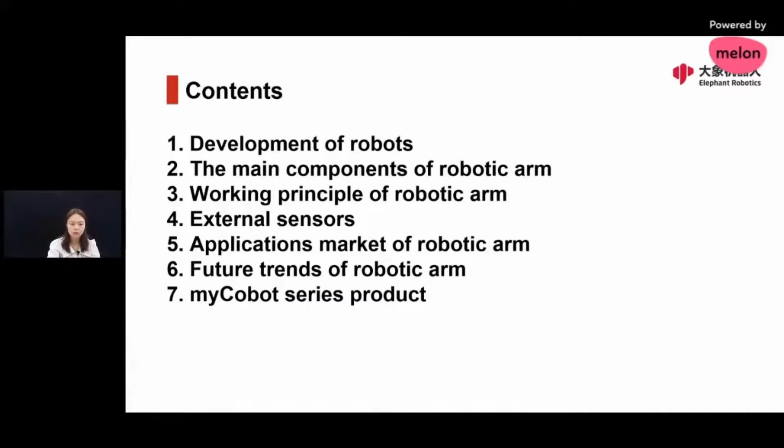So let's begin. Let's look at the development history of robotic arms. With the progress of development of human society, more science and technology culture is displayed in front of the people. In order to solve the problem of travel, people invented cars, trains, and some traffic tools. And in order to solve the energy problem, people invented wind energy, solar energy, nuclear energy, and tidal energy, and other power tools. And here we come to another problem, which is the rising labor costs.

So people invented robots. Since the emergence of robots, we have introduced the concept of robots in all walks of life. Up to now, robots have been involved in many areas, such as industrial, medical, social, and automatic driving areas. So what is the definition of robot?

What exactly is a robot? Let's look at the definition. A robot is defined as a programmable actuator that has a certain degree of autonomy and can move in its environment to perform some tasks.

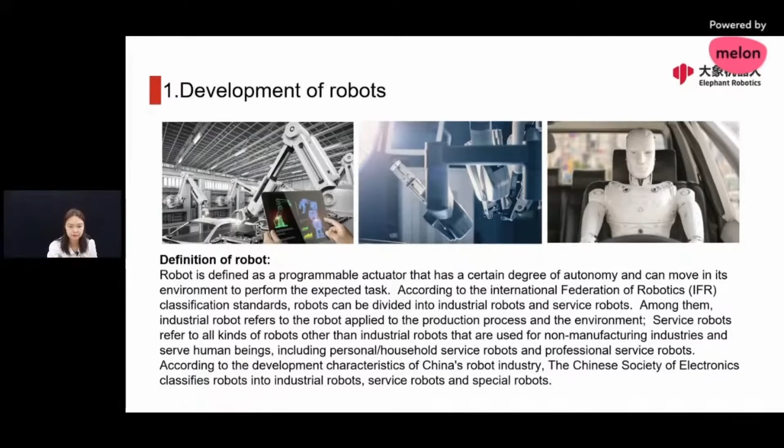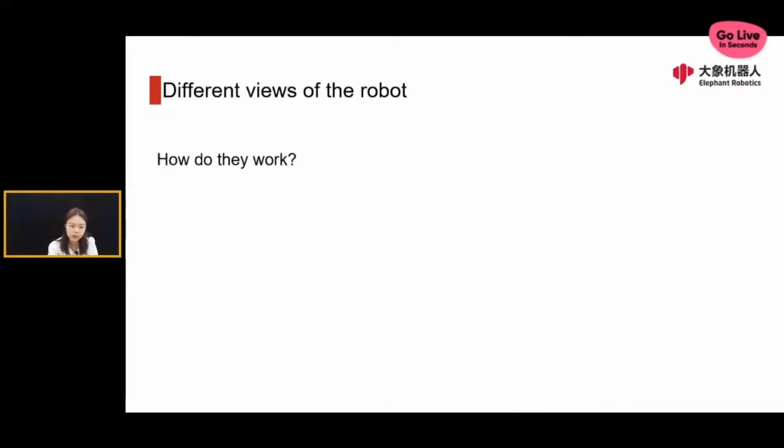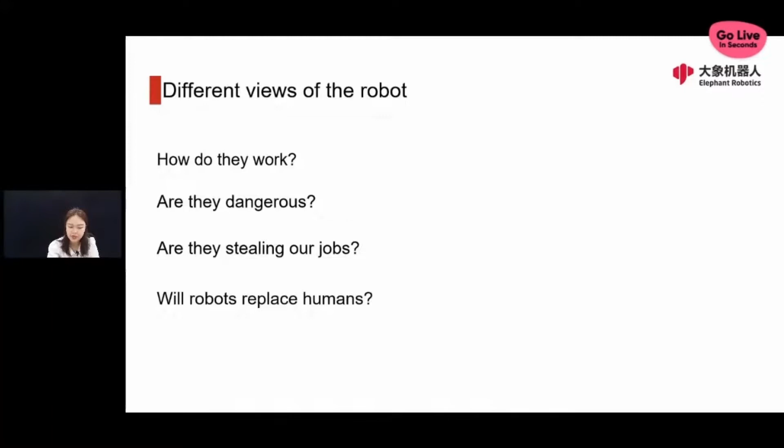So according to the event of the robot era, everyone has different views of the robot. Maybe many of you have some questions about the robot. How do they work? Are they dangerous? Are they stealing our jobs? Especially since we have mentioned that many robots are used in the manufacturing line to hire labor, human labor. Will the robots replace humans? How can we use them? What can they do for us? How do robots interact with people?

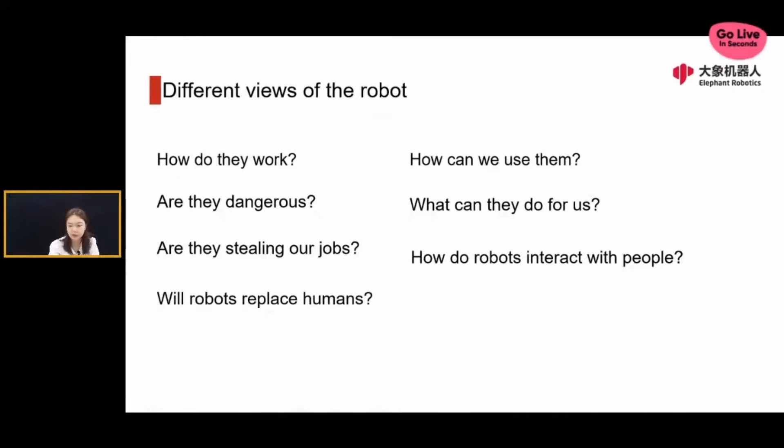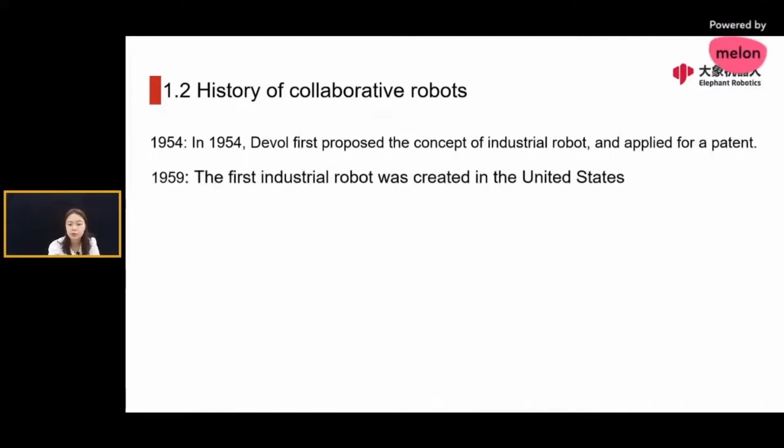With these questions, let's learn about robot development. I'm going to talk about the history of collaborative robots. In 1954, Devol first proposed the concept of industrial robot, and they applied for a patent. In 1959, the first industrial robot was created in the United States, and in the 1980s, industrial robots were further developed and played a very important role in this era.

In 1982, General Motors of the United States equipped robots with a vision system on the assembly line. So that's when perceptual robots were invented. Perceptual robots have external sensors, which we will talk about later. The offline programming can be carried out with the support of the sensing system with different degrees of environmental perception and self-correction programming functions.

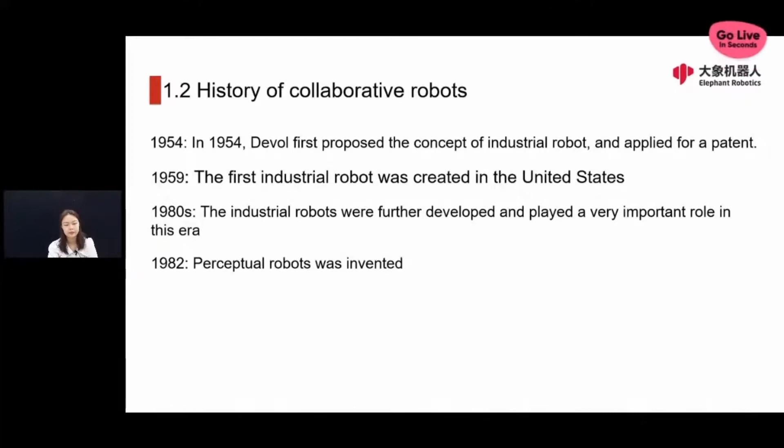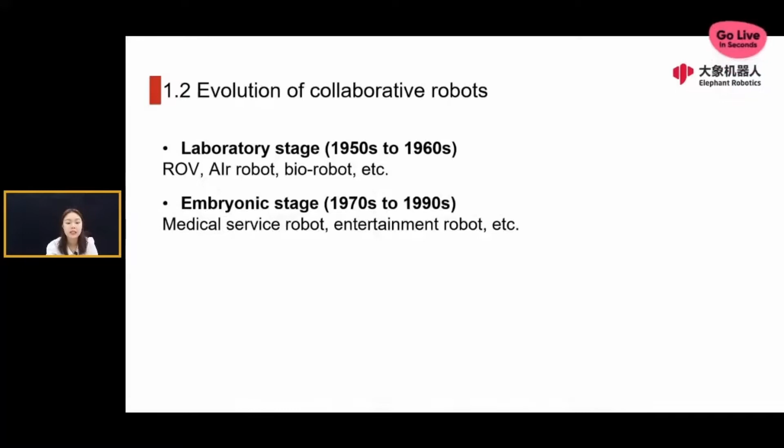We have divided the evolution of collaborative robots into 3 stages. The first is the laboratory stage, from the 1950s to 1960s. The second is the embryonic stage, from the 1970s to 1990s, when medical service robots and entertainment robots came into the public. The third stage is now, called the development stage.

The fast development of computers, the internet, and human-robot interaction has led service robots to be widely used in many applications. You may have seen some service robots on the street and in restaurants delivering food. That's the service robots.

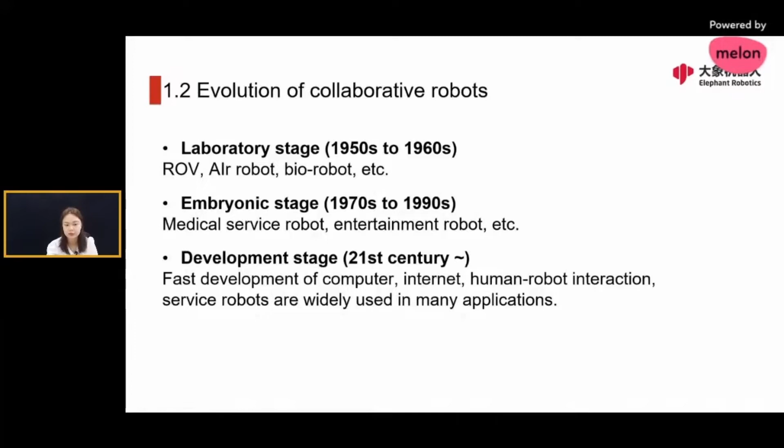So we have talked about the definition of a robot and the categories of robots. Now we will talk about the main components of a robotic arm. What composes a robotic arm?

The first one is the robot's body. The second one is the electric control box. And the third one is the demonstrator.

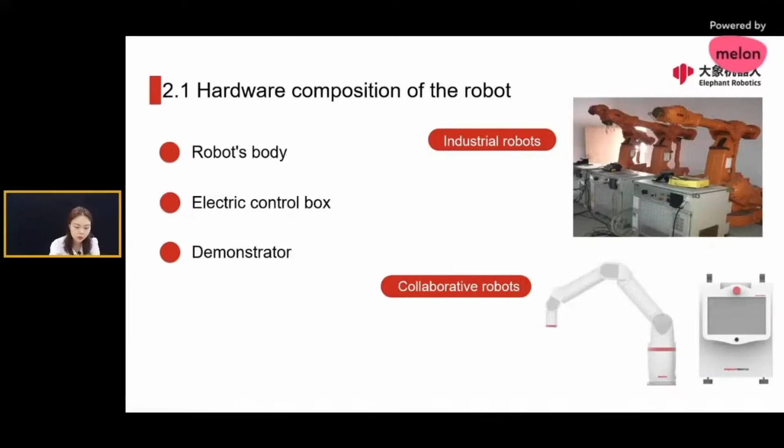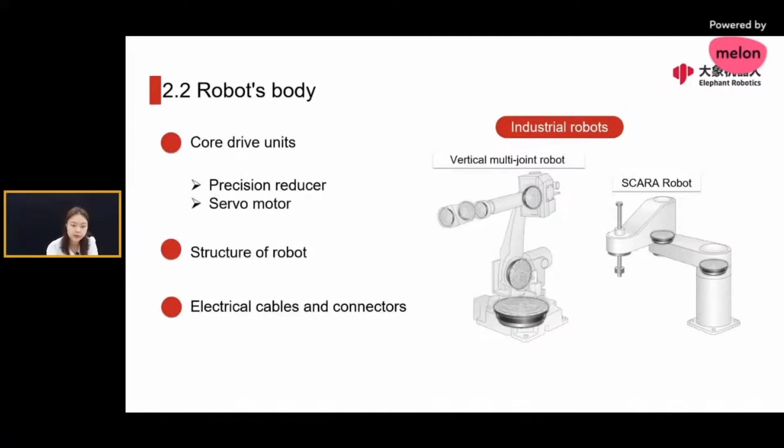In terms of the robot's body, let's look at the industrial robots here. They are composed of 3 components as well. The first one is the core drive unit. The second one is the structure of the robot. And also, because the robot needs to be powered, it needs electrical cables and connectors.

We can see from the picture there are 2 kinds of industrial robots: the vertical multi-joint robot and the SCARA robot. Here we want to talk more about the structure of the robot.

We can see all the manipulators, all the robotic arms, are made of connecting rods. This is the rod, and the rods can be connected by joints. These joints are usually equipped with position sensors that measure the relative position of adjacent links. The position of the revolution joint is called the joint angle.

So in fact, this rod is the main component. As I mentioned before, the main rod and the joint are the mechanical structure of the body. And the joint is also the core transmission component.

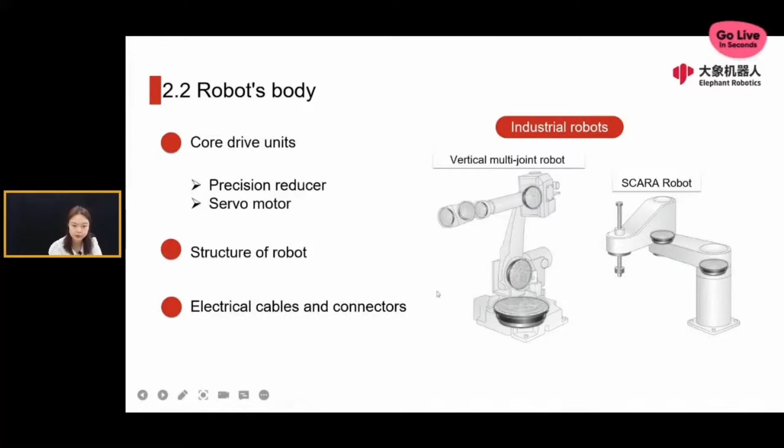If we look at the collaborative robots, the structure is relatively similar to that of the industrial robot. They are composed of core drive units, structure of robots, and also electrical cables and connectors.

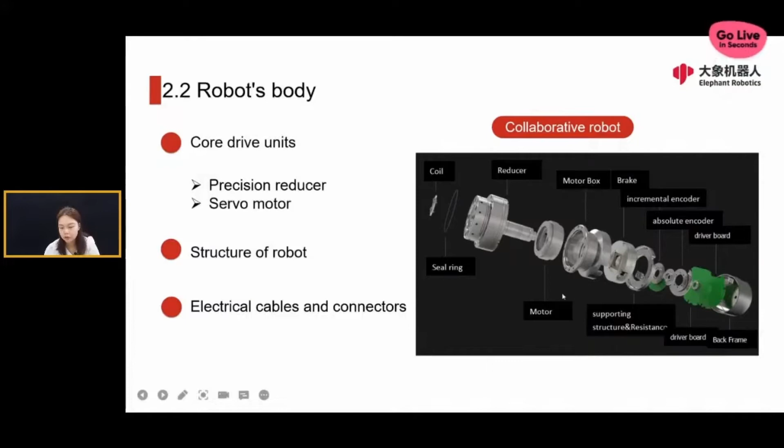But here there is a little bit of difference. We are going to talk about the core drive unit, or core transmission unit, which is the precision reducer and a servo motor. We can see in the picture here there is a reducer, and inside a motor box there is a servo motor. That's how the robots can move.

Let's now talk about the precision reducer. There are two kinds of precision reducer: the harmonic reducer and the RV reducer. So why do we need to use the speed reducer? Have you thought about this question before?

As we know, the servo motor speed is very high. In this case, the torque is very small. So how do we improve the torque? The answer is to slow down the motor, so we use a speed reducer.

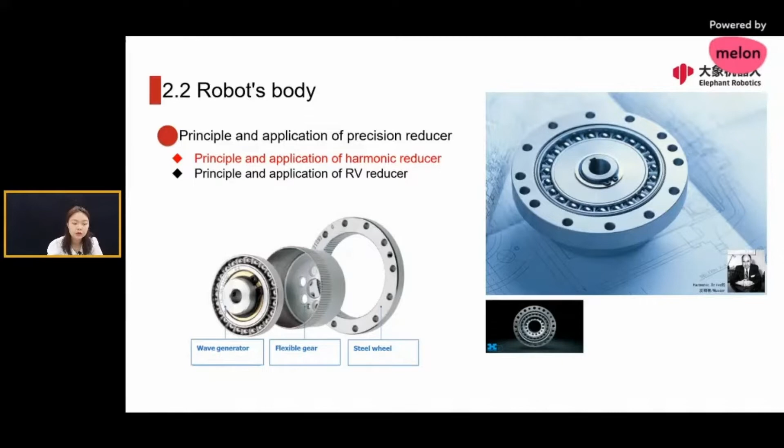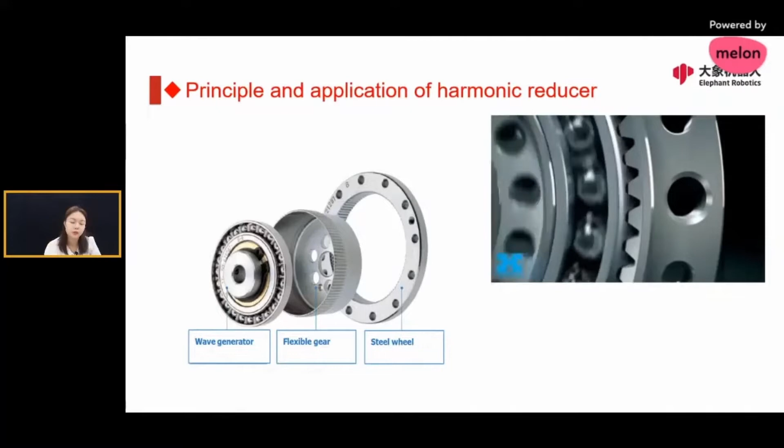The harmonic reducer is mainly composed of three parts: the wave generator, the flexible gear, and the steel wheel. In this picture and video, you can see the speed of the inside circle is relatively high, but in the harmonic reducer, the speed of the outside circle will be slowed down. That's how we use the harmonic reducer to slow down the speed.

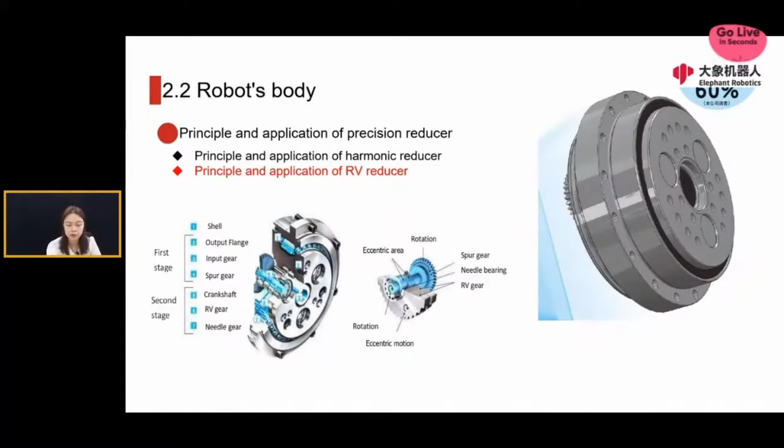There is another kind of speed reducer, the RV reducer. This reducer is more complex, so we are not going to talk about it. We just need to know that the precision reducer's function, or purpose, is to reduce the speed, and that's how we can improve the torque of the body of the robot.

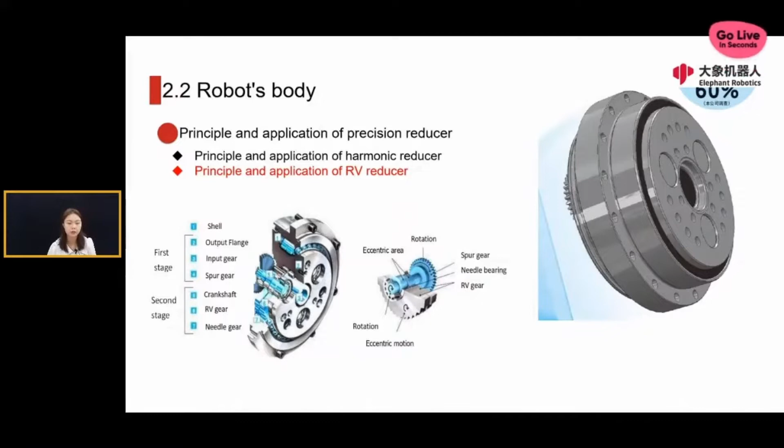Besides, we can also look at the servo motor. This is another very important core transmission component. The commonly used motor is the servo motor. There are two types of servo motor: AC servo motor or DC servo motor.

How does a servo motor work? When the servo motor receives a pulse, it will rotate at a corresponding angle. The servo motor itself also has the function of sending pulses, so it receives pulses and can also send pulses.

When the servo motor rotates at an angle, it will also send a corresponding pulse, and the pulses contacted by the servo motor will form an echo, or closed loop. So the system knows how many pulses are sent to the servo motor and how many pulses are received from it. In this way, the system can control the rotation of the motor to achieve very accurate positioning, with positioning accuracy up to 0.01 millimeter.

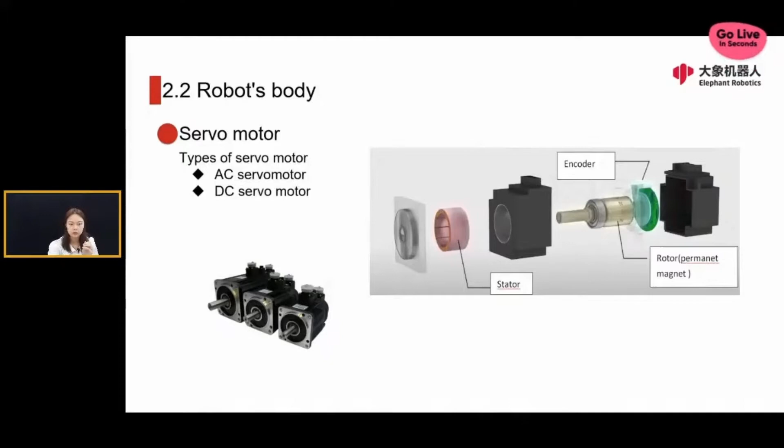So now let's talk about some mechanical structure of the robot. We can see there are three parts: the mechanical principle and constitution. We have mentioned it before. Did you remember that we have mentioned the rods and the joints? That's the mechanical structure of the robot.

And the common mechanical design has two types: finite element analysis or modal vibration analysis. In this part, we are going to give you a brief introduction, but we are not going to go into detail. If you have any questions about this mechanical design, pop them up in the chat room, and we will answer you after this section in the Q&A.

The third part is the machining technology. The common machining technologies include CNC and casting. These two are very important, but we are not going to give a detailed instruction because of the limitation of time. So we only need to know, in order to understand the mechanical structure of the robot, you need to understand the mechanical principle and constitution, the mechanical design, and also the machining technology.

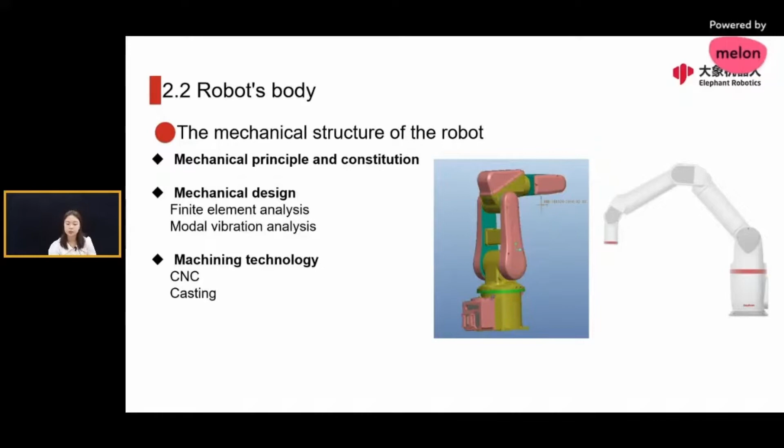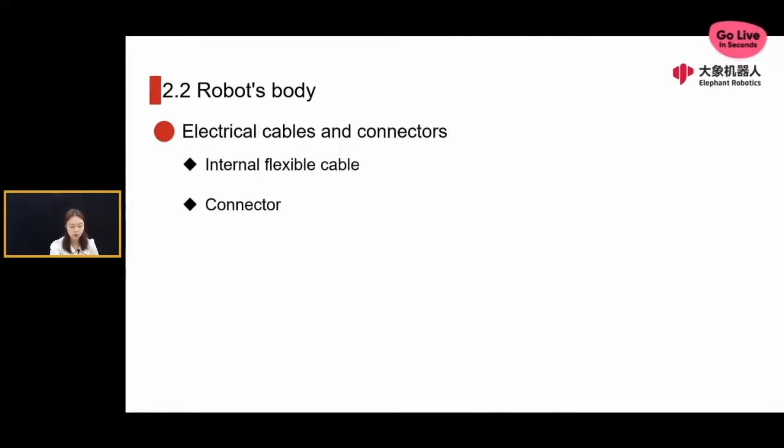The last one is the electrical cables and connectors. The cables used in robots are mainly internal flexible cables, and we also have connectors to make every cable connected together.

So we have talked about the structure of a robotic arm. So how do we move a robotic arm? In what direction and at what speed? The answer is the software. So we will talk about the working principle of the robotic arm.

In this figure, you can see the software architecture of the robotic arm. It has several very important factors. If you look at the control box here, we have three important factors: the position, the speed, and the current.

So we can understand that the robot moves to the corresponding position according to the corresponding speed. You want to move it to this position at very high speed or very low speed. That's what we can control. How do we control it? So here we have the current adjustment. The current is used to calculate the driving force of the robot.

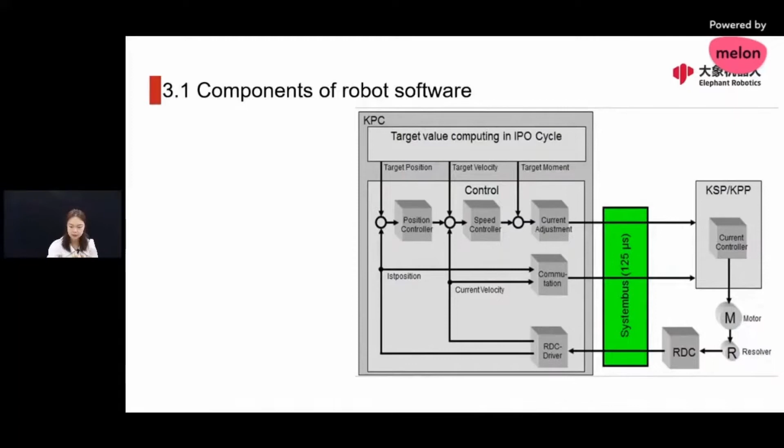Combined with these factors, we can carry out kinematic modeling. So we have the core algorithms here, the kinematic algorithm module and the dynamic algorithm module. Again, because we are not going to talk too much about the algorithm, we have listed the core function, the core algorithm here, so you can take a screenshot if you are interested. You can look up the online materials, or we can also provide some materials according to these algorithms later.

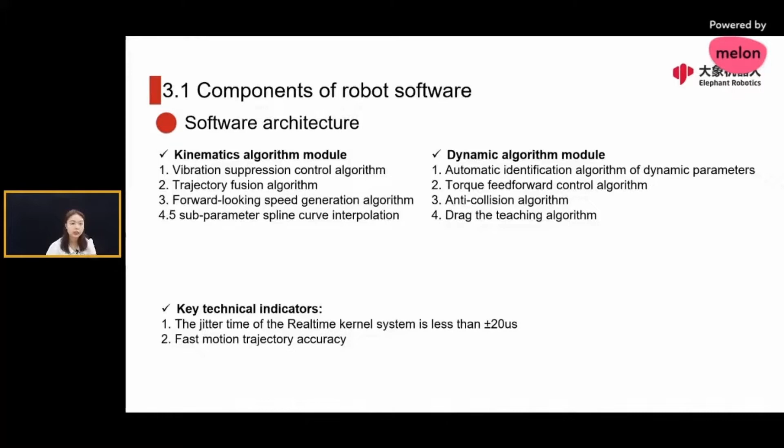Now we have two algorithm modules here, but how can we judge if the technical indicator is good or not? We have two key factors. The first one is the jitter time of the real-time kernel, and the real-time kernel system time should be less than 20 microseconds. The second one is the fast motion trajectory accuracy.

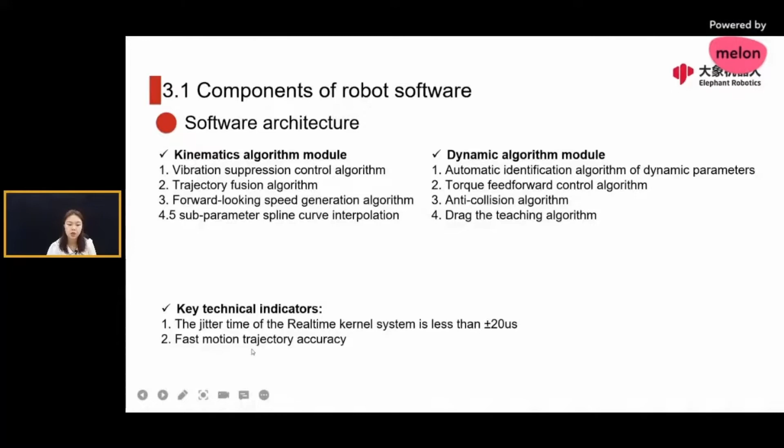So the core algorithms are listed here, and we will provide the link later, if you can see, in our chat room. These are the robot controlling functions. There are a lot, and it is impossible to go into too much detail on every core algorithm function. So that will be left to you for further development and further expansion.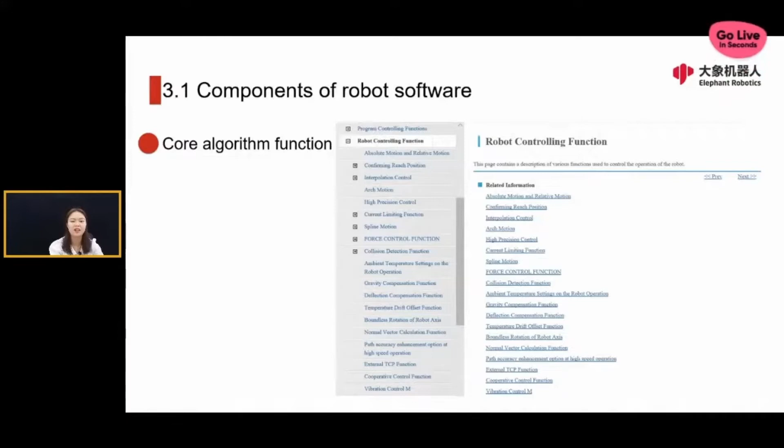So we have talked about the structure of a robotic arm, and we have also talked about the hardware and software of a robotic arm. We are now going to talk about some external sensing devices.

Why do we need external sensors, and how are they used in the robotic arm? Although the safety of the collaborative robot is higher than that of the traditional industrial robotic arm, it is still impossible to complete complex work by relying only on the robotic arm itself. In order to solve this problem, human-robot interaction technology has been introduced. So now, what is human-robot interaction? What does it mean? It refers to the technology of communicating with a computer in an effective way by means of computer external hardware equipment.

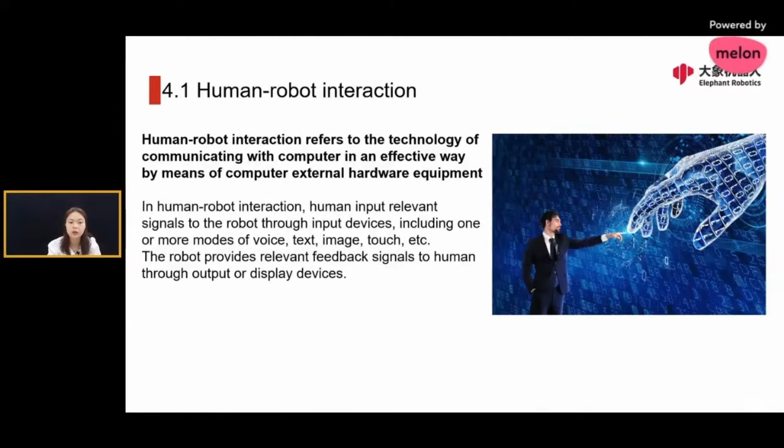In human-robot interaction, humans input relevant signals to the robot through input devices, that is, sensors, including one or more modes of voice, text, images, force, touch, etc. After receiving the input signal, the robot provides a relevant feedback signal to the human through output or display devices. That is human-robot interaction. So scientists and engineers have introduced a variety of sensors to solve the problem of input signal recognition for robots.

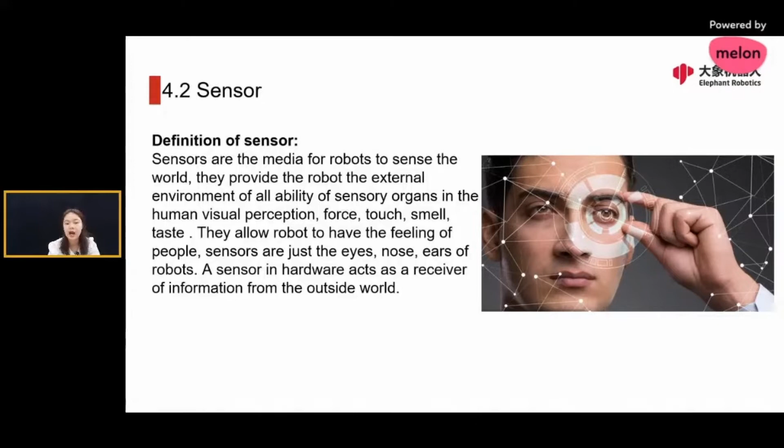But some people may not know exactly what a sensor is. So let's talk about the definition first. Sensors are the media for robots to sense the world. They provide the robot with external environment signals, giving it the ability of sensory organs like human visual perception, force, touch, smell, and taste. With these sensors, robots can have the feeling of people. Sensors are just like the eyes, nose, and ears of the robot. A sensor in hardware acts like a receiver of information from the outside world.

What are some common sensors for robotic arms? Here are three types of common sensors: the first is the infrared sensor, the second is the TOF sensor, and the final one is the 2D camera. There are many other sensors used in robotic arms, but here we are going to talk about these three common kinds.

The first one is the infrared sensor. Generally speaking, infrared sensor refers to infrared proximity sensor. Its working principle is to detect the frequency of electromagnetic radiation of objects. As long as the temperature of an object is greater than absolute zero, it will emit electromagnetic radiation, and this radiation can be detected. The radiation frequency emitted by human beings belongs to the infrared radiation. As long as the specific infrared frequency is monitored, the infrared proximity sensor can judge whether a human is near, which is very safe since it can keep a safe distance from humans.

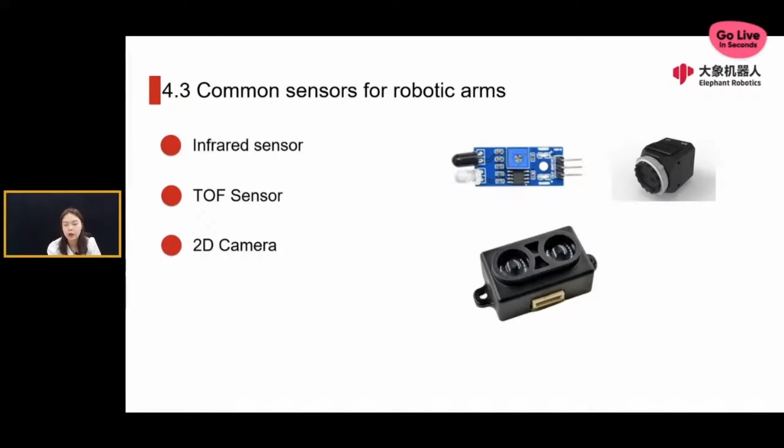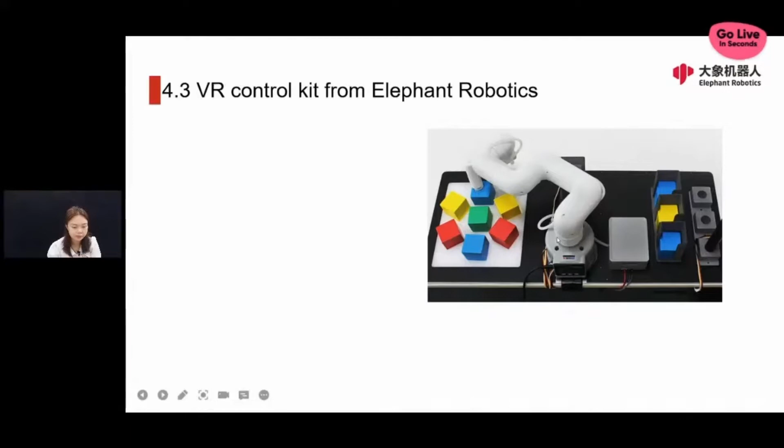For example, we have an AI kit, a VR control kit from Elephant Robotics. In order to make the automatic assembly robot operate in a flexible and accurate environment, many sensors are installed in this robotic arm - for example, visual sensor, laser distance sensor, ultrasonic distance sensor, force sensor, proximity sensor, and displacement sensors are installed in this robotic arm, which is myCobot of Elephant Robotics.

How do they work? Among them, first, the vision sensor is used to identify the objects here. We can see the object is a block with different colors, so the vision sensor can recognize different colors. It is also used to guide the laser distance sensor and ultrasonic distance sensor to get the corresponding position information, so it knows the distance between the arm and the objects.

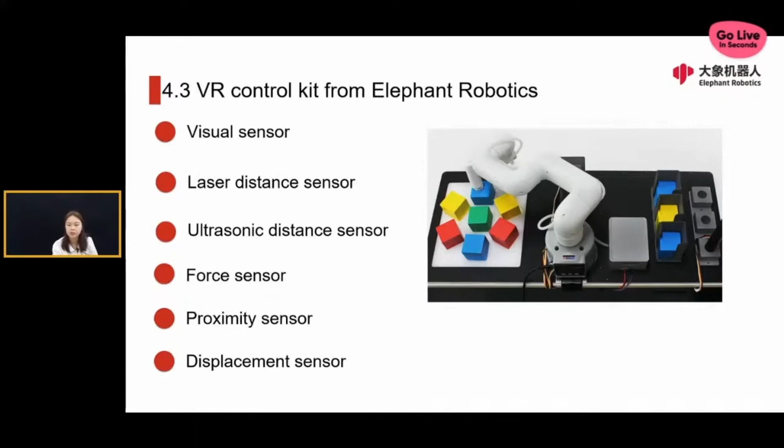We've talked a lot about the robotic arm now. So how can we use the robotic arm combined with the sensor? Now we are going to talk about the application market of the robotic arm. Can you think about some common applications of a robotic arm? Can you type in the chat room?

When we think about the application of a robotic arm, we may probably first think of the palletizer, right? To move an object from one position to another in the assembly line. So that's one common application market.

Here are three I'd like to mention. The first one is the 3C electronic assembly field. That's the application I mentioned before, to put an object from a position to another position. But in the 3C electronic assembly line, it's a little different, because the components of 3C electronics are very small. So it can complete chip packaging, because we can make the robotic arm's accuracy very high, so it can put a very small object from one position to another.

We can also use the robotic arm to do other things, like chip packaging, also with the visual system, using all kinds of sensors and other equipment. So this kind of robot can put small 3C electronic parts, welding installation in place, and also ensure considerable efficiency.

Another one is the automotive parts assembly field. Collaborative robots can choose the ways to install in different complicated industrial environments. It can choose ground, hanging, or tilted installation. And the use of more than one robot can complete some bulky auto parts assembly.

So we can make several robots work together to complete the automotive parts assembly line. Especially, this kind of robot has very excellent precision and very excellent speed, so we can improve the productivity of this part.

The last one is scientific research and education. This is also one of the important application fields of collaborative robotic arms, mainly because this kind of robot can transfer the operation logic through programming to complete different types of work, which is of great help to students of various majors in industrial robot research. So students, under the guidance of teachers, can use this robot to create more applications and understand how a robotic arm works.

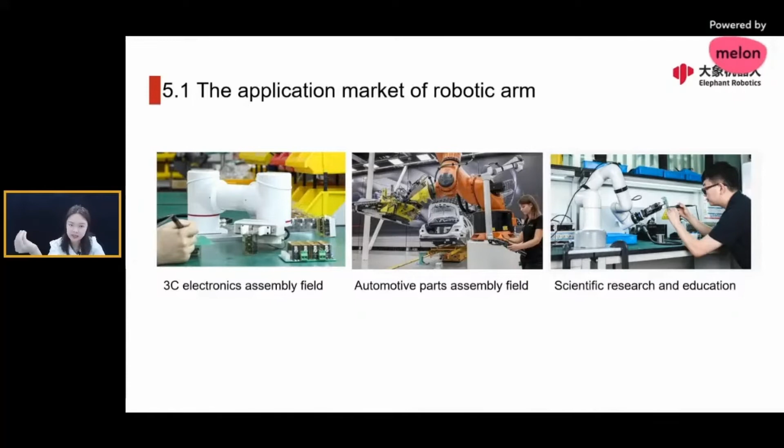So we have talked about the common application markets of robotic arms. We also want to look into the future. What is the future chance of the robotic arm? Think about it, right now we are in a COVID-19 epidemic era, so what can we use robotic arms for? If you have any ideas, could you please chat in the chat room, and we will see your ideas and thoughts. Your ideas and thoughts might be useful for us and for this industry.

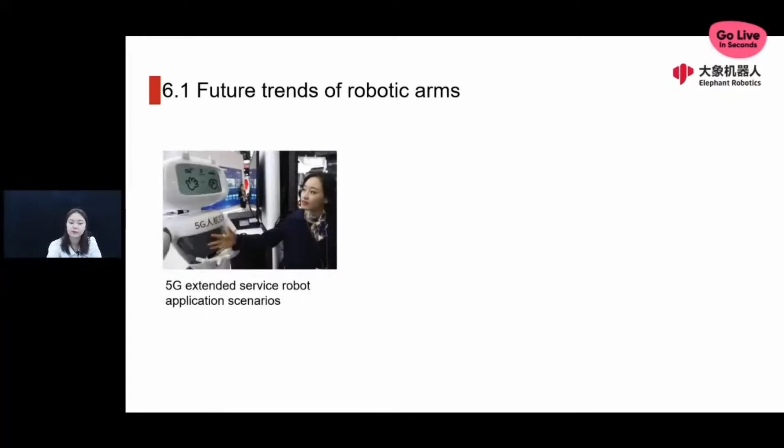The first one is the 5G extended service robot application scenario. With the emergence of 5G, artificial intelligence and cloud computing, the development of relevant technologies is promoting the evolution of service robot technologies and function, developing towards more sensitive perception, finer operation of control, and more intelligent human-robot interaction.

5G technology features high speed, low delay, and large connection capacity. It can transmit massive data in real time, and it provides network support for real-time application of service robots.

On one hand, relying on 5G technology, relevant data can be quickly transferred to the cloud to provide data support for customer analysis of reception robots and marketing decisions of new retail robots. On the other hand, 5G technology enhances cloud capabilities and provides high speed, stable network support for remote diagnosis and treatment of reception robots and remote control of the robotic arm.

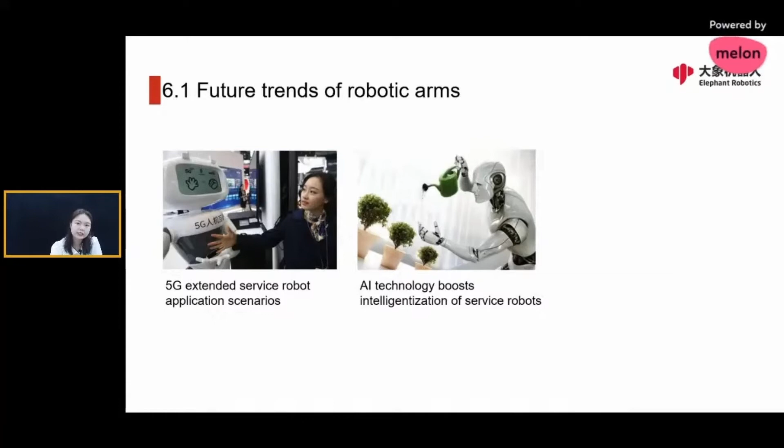We can also extend the scene coverage of the service robot. SLAM technology can be used for accurate guidance and positioning, which greatly improves working efficiency and ensures the safety of collaborated robotic arms.

Using robot vision technology, collaborative robots can realize active visual interaction and assist navigation. We've had some breakthroughs in language processing as well, so deep learning and language communication and emotional communication ability will be significantly improved. Reception robots, companion robots, and other future robots can benefit from AI technology.

The final one is the COVID-19 epidemic era. Because of this epidemic, COVID-19 has deepened the application of collaborative robots. COVID-19 is not very good for most of us because it is bad for our health, but in this kind of trend, COVID-19 could be a benefit to some industries.

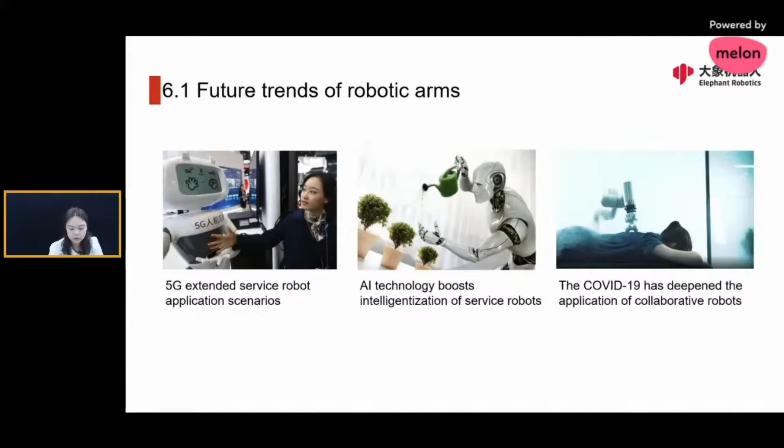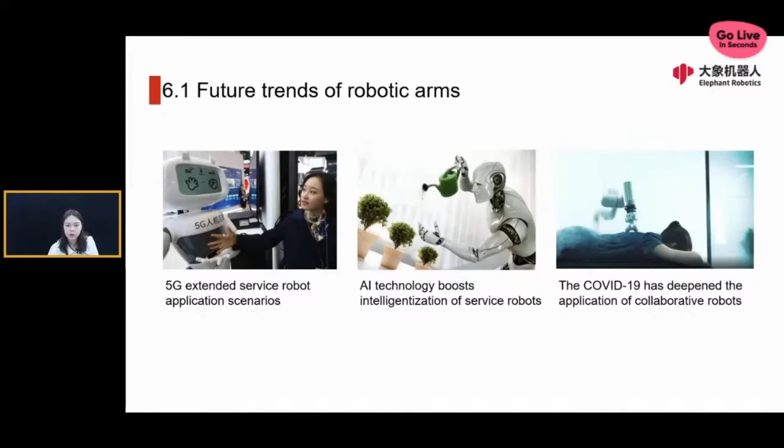So we might see more service robots, such as intelligent guidance, infrared temperature measurement, and identity recognition verification, grow for a long period of time because of COVID. We need to keep social distance, so some work should be replaced with this kind of collaborated service robots. We may see more delivery robots, reception robots, and new retail robots. That is the future trend of these robotic arms.

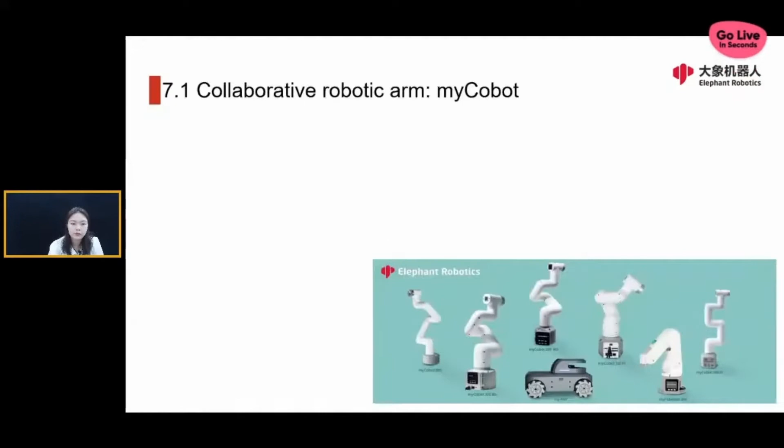At the end of this presentation, I would like to show you some products of Elephant Robotics. The myCobot series is the first one, the first all-in-one collaborated robot in China, which was launched in 2018.

So what does all-in-one mean? Think of a laptop right now versus a computer back in the 1980s. In the 1980s, a computer was composed of several components like a screen, a keyboard, a mouse, and a processor, which was very large. When we talk about a laptop in the 21st century, the keyboard, mouse, screen, and processor can all be put into one book-size device. That's what all-in-one means.

And it is the most open source 6-axis educational robotic arm, which is very affordable. We have a lot of libraries and materials uploaded online, so people can look into the Gitbook of Elephant Robotics.

To learn more about the programming, the board, and also the installation environment of a robotic arm, and most importantly, the algorithm of how to use a robotic arm. These are all open source materials.

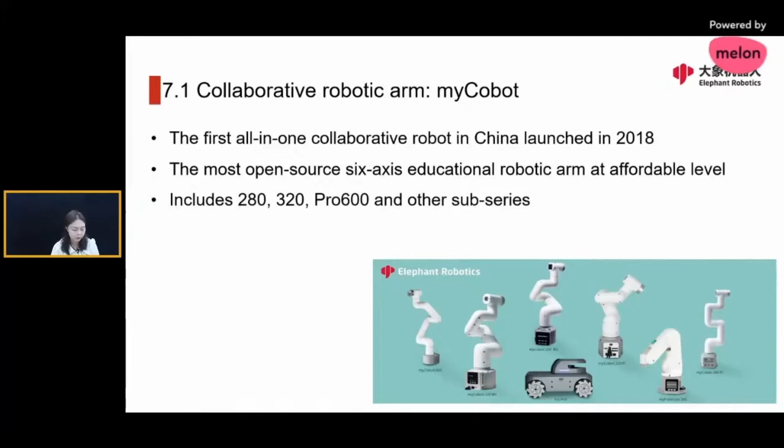The core master control is divided into microcontroller and microprocessor. For most users, I think these myCobot series can meet different demands for research, commercial display, and other functions. Finally, myCobot is suitable for education, scientific research, and commercial application.

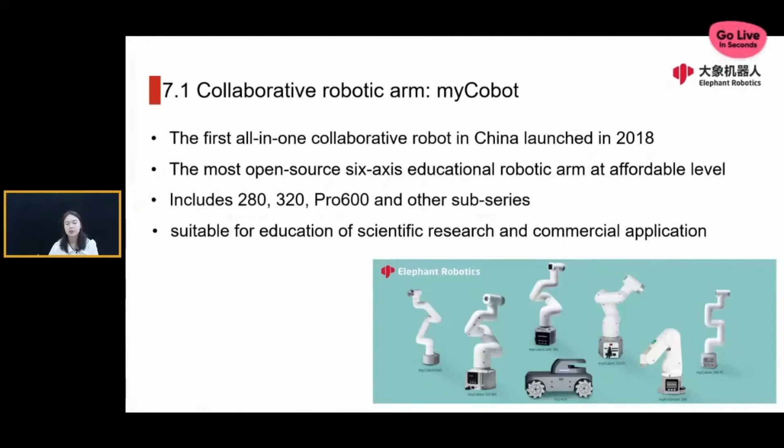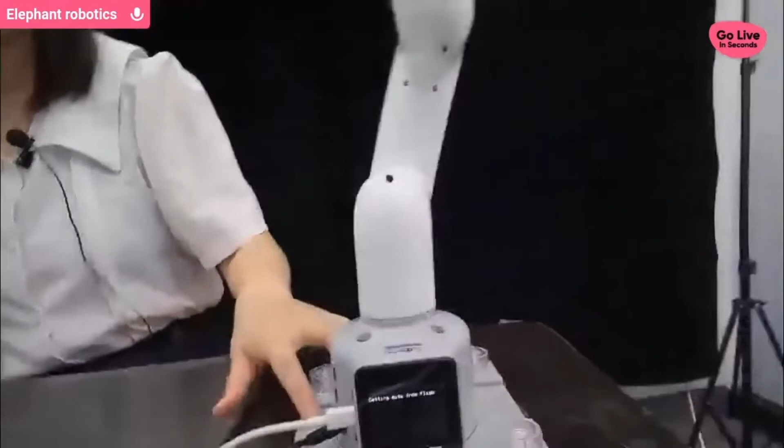So we have another new robotic arm here, and I'm going to demonstrate the basic function of drag and teach. Now this one is another one, so this function is successful, and I will demonstrate you one more time.

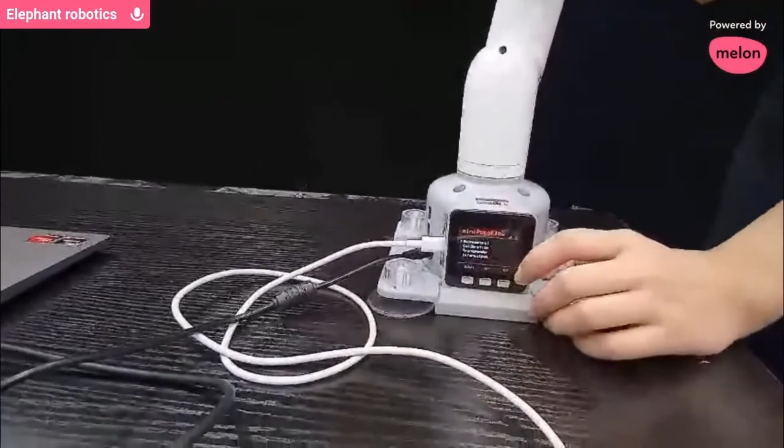Okay, so if you click the... I will show you how to enter the main control. Here we have the arrow pointed to the main control, and if we click OK, it will go into another main control display menu. So here we click play.

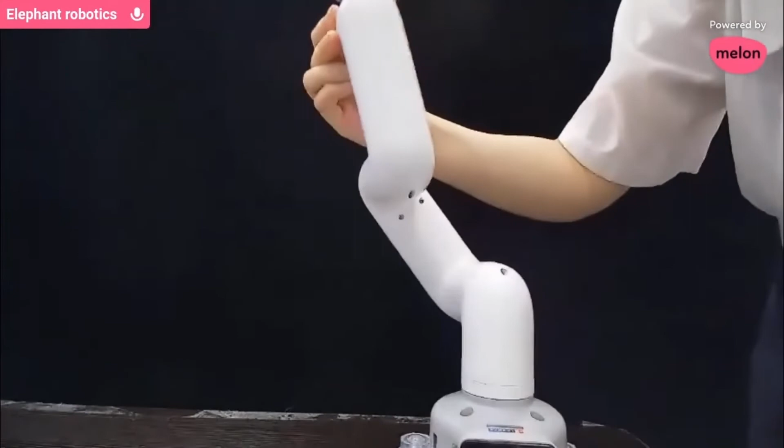We click record and click flash, and now we drag the robotic arm to whatever direction we want. After finishing the dragging, we can click save. And now we want to play what we done before, so click play here and click flash. We can see now the robotic arm repeated the movement I did before.

So that is the simplest way to control your robotic arm with only several clicks of a button. In this way, you don't need to know any programming knowledge, and you can make the robotic arm move as you like. This is a starter instruction.

And now we will show you how to control the robotic arm using myBlockly. myBlockly is a software developed by Elephant Robotics, and it is based on Python syntax. So if you are interested in using Python and myBlockly, that will be a very easy and fun way to control the robotic arm.

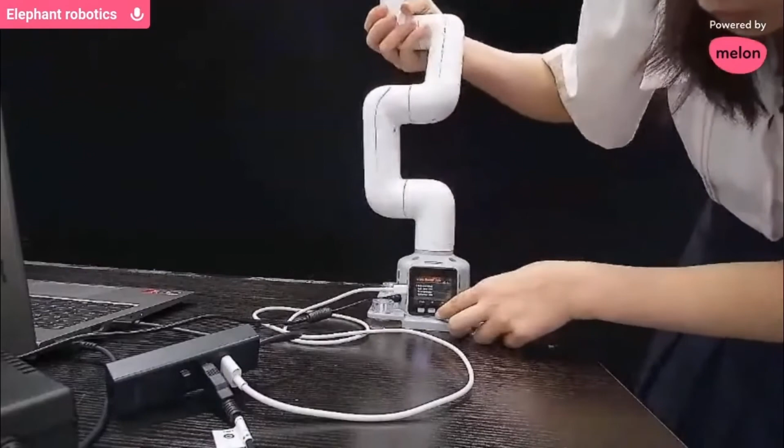So we have the USB connected to the computer. Now if you had connected, we can see the icon here is okay, that means the connection to the PC is successful. So now here, I will again share the myBlockly screen with you.

So if we click the red button here, we can use the COM port, and the baud rate is 115200. We need to make sure the port number here in this syntax is exactly the same as in the toolbox. Now we click open, and we can see here it means our connection is successful.

If you click autocomplete, we can see that if your connection is truly successful, the parameter should not be 0. That means we need to change to another port, which is COM11. We will connect again. Now this time we can see that the parameters here are not 0, that means this time the connection is truly successful.

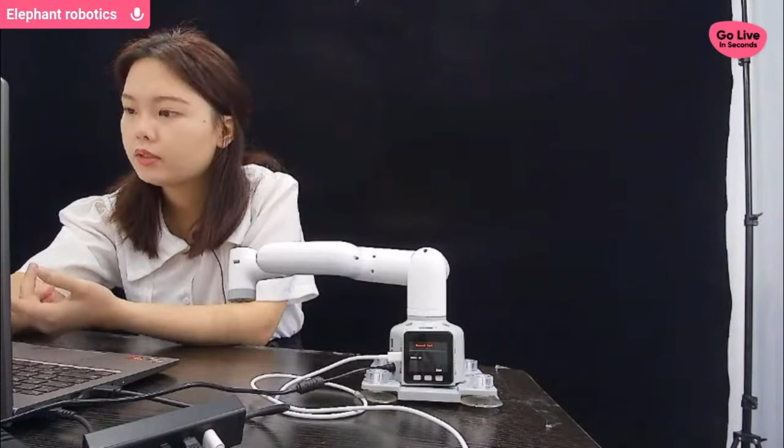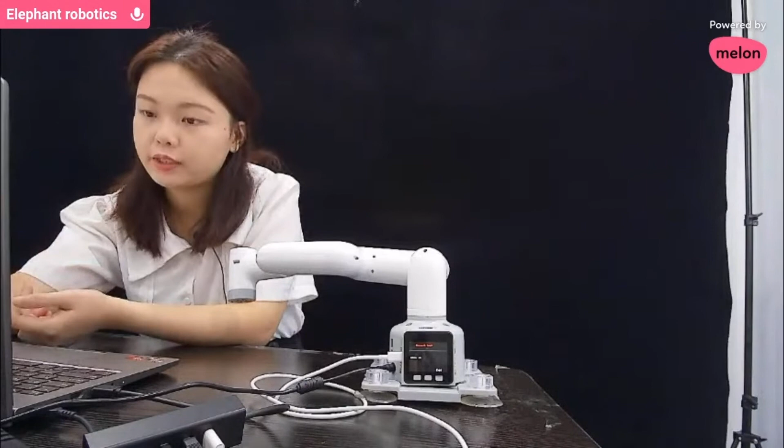The fifth question: what's the difference between M5 and Pi? M5 Stack and Pi, which is Raspberry Pi - the difference is you can see from the appearance. There is a screen on the M5 Stack, but no screen, no button on the Raspberry Pi version. The systems are also different. The Raspberry Pi mainly supports Linux, Ubuntu system, and the M5 Stack version first supports Windows, though other systems can also be used, but the priority is not so high.

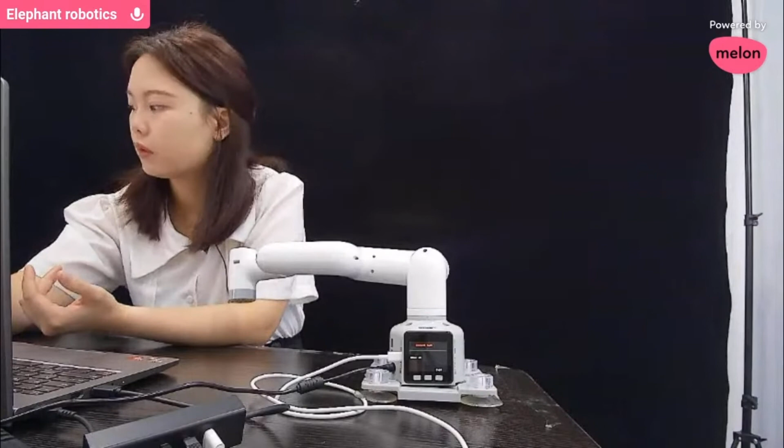Both versions allow direct programming, but M5 needs to build the environment, while the Pi version does not - it was built inside, so users don't need to build the environment themselves for the Pi version. So these are the common questions, and I hope my answers are useful and helpful for you.